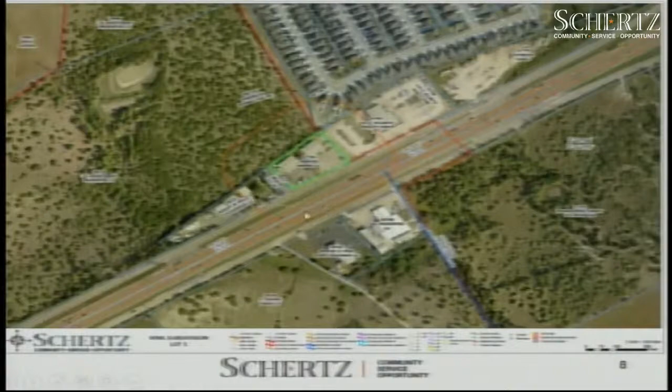Here is the public hearing notification map. Again, outlined in blue is the subject property, with the 200-foot notification buffer. Here is the City of Schertz city limits and the City of New Braunfels on this portion. We sent 9 public hearing notices on April 28, 2021, and no responses have been received at this time.

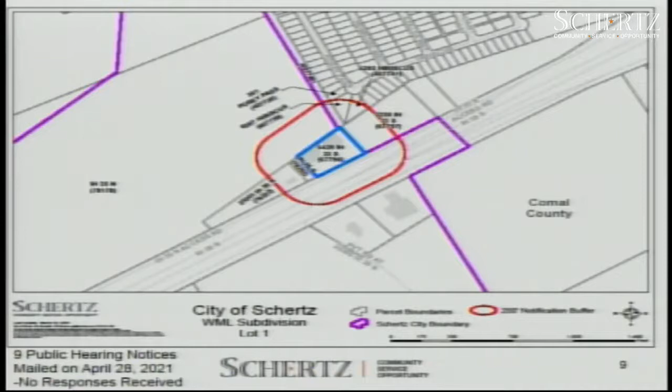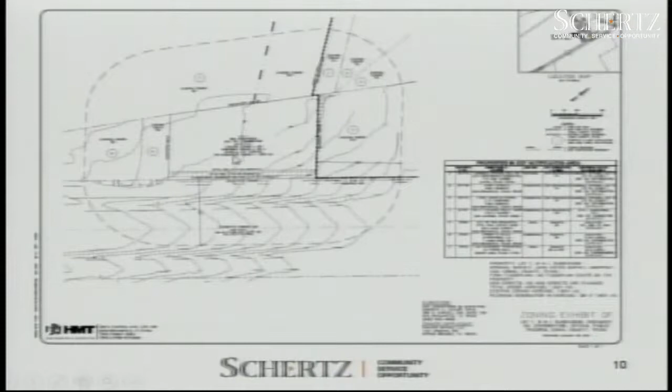Here is the zoning exhibit, demonstrating the subject property for reference, along with the City of Schertz city limits, City of New Braunfels, and IH-35. This is for the zone change from GB to GB2.

Outlined in yellow is the subject property. This is our current zoning map for the City of Schertz. The subject property is currently surrounded by parcels zoned General Business District and Pre-Development District, as you can see in purple to the north, with General Business adjacent to the City of New Braunfels. This is the City of Schertz city limits line, New Braunfels city limits, and the IH-35 frontage and highway. Except for the property within the City of New Braunfels, the immediately adjacent properties are currently undeveloped. As mentioned, here is that development in the General Business District.

This is an undeveloped parcel, as well as to the west, also undeveloped general business. Due to the surrounding zoning and land uses, the rezoning of this property is not compatible with the adjacent land uses, as it could allow for higher intensity commercial and industrial uses along the IH-35 frontage. The existing general business zoning designation is more compatible with the surrounding properties, along with the desires of the comprehensive land use plan.

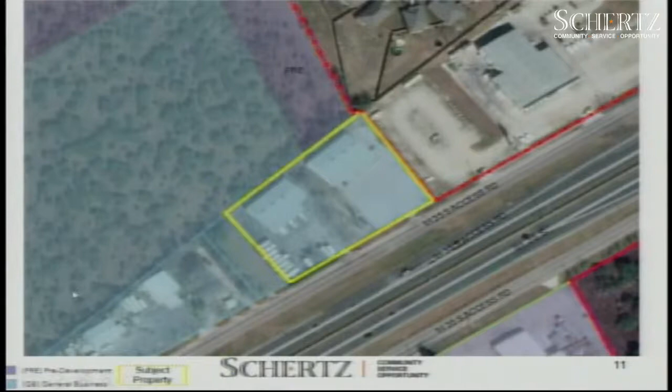Here is our comprehensive land use plan with the designation of the commercial campus outlined in blue. The objective of the commercial campus future land use designation is to accommodate development of lower intensity commercial and office uses, utilizing a variety of mostly office, flex space, and light industrial. The commercial campus designation is associated with the General Business District based on the land uses allowed by right per the Unified Development Code table. Shortly I'll have a slide with those designations.

The General Business District 2, GB2, is a high-intensity zoning district which permits land uses that would not be compatible with the desires and objectives of the commercial campus, which overall is to maintain lower intensity commercial and office use along the I-35 frontage. Just to reiterate, this is the I-35 frontage right in front of this subject property.

The proposed zone change from General Business District to General Business District 2 is not compatible with the comprehensive land use plan and the Schertz sector plan, as the upzoning would allow for higher intensity land uses, which would not be in line with the current designation of having the I-35 frontage corridor identified for lighter intensity commercial retail type land uses.

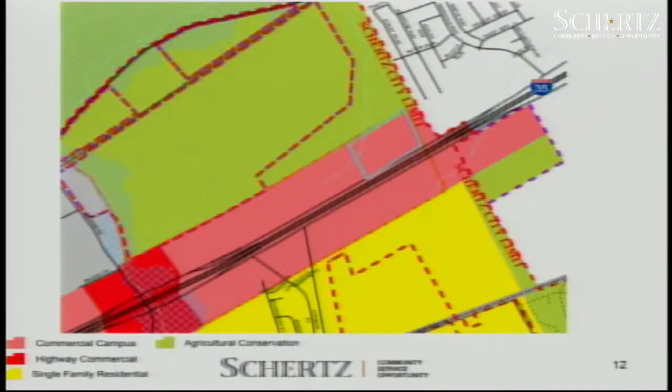This is from our permitted use table within the UDC. The following uses would be permitted by right or could be approved with an SUP if the proposed zone change to GB2 were approved, that are not currently permitted by right within the general business zoning district. Let me go over a few of these.

Currently, airport, heliport, and landing field would require an SUP in general business; however, under general business 2 this would be permitted. Another example is automobile repair and service major, which requires an SUP in general business district, but would be permitted by right under general business 2. General manufacturing and industrial use would also be permitted by right, as well as office, warehouse, and distribution center. Truck terminal would require an SUP for general business, but would be permitted by right with general business 2.

This gives an idea, since there have been questions wanting to know the distinction of the general business 2 designation versus other land uses, of what could be permitted by right within that general business 2 district.

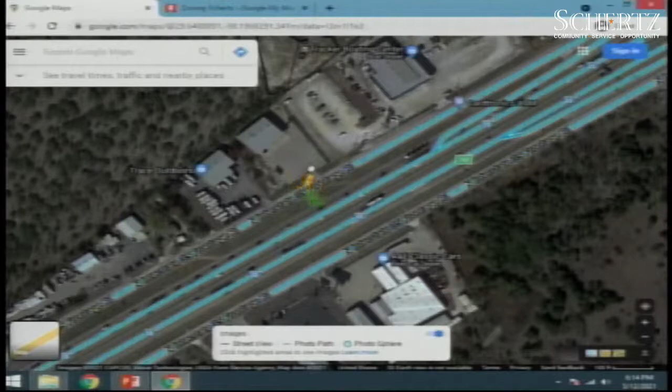I'm showing the overhead satellite view of our property here, and you can see this is the primary problem we're dealing with right now. This is 6410 North I-35. This piece of property is surrounded by an RV center to the left and a boat distribution center to the right. Let me show you—I love this little guy, he just bounces right wherever you drop him.

So that's our building. The most recent tenant was Stable Lift Foundation Repair. They would go underneath your house, jack it up, get it level, come back later and seal the house back up. That was their job. They filed bankruptcy in August of last year—that's been a joy. But every night they had this scenario going on. This is a picture from Google Maps, but it's an accurate representation. From morning until night, they always had cars parked in front, mostly up underneath these eaves. Sometimes they'd have one or two vehicles.

Let me show you what's to the left and what's to the right. To the right is Tracker Boats. While the Tracker shop over there is in the city of New Braunfels, all these boats parked there are backing up to the city line between Schertz and New Braunfels. So if you're looking for consistent use, that's at least one thing to look at, okay?

But let's look at the left. This is in the city of Schertz—this is Texas RV Repair and Sales. They have a repair and sales shop for large motorhomes, parked there 24 hours a day, 7 days a week, which under the GB zoning is a non-conforming use, a violation, okay? If we turn around for reference, this is the classic auto shop across the way that has 7 or 8 vehicles parked there 24/7, morning, noon, and night. Slightly to the right of that is Blackjack, another automotive sales and repair center, also zoned GB, but has an SUP so they get to do major automotive repair. Still doesn't allow them to park overnight.

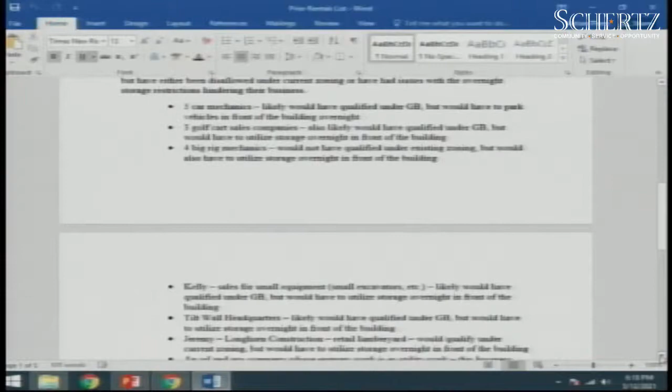Come on down to the rejected use, please. Since then we've had 5 car mechanics who'd like to come be in there, but they can't park in front overnight. 3 golf cart sales companies, but they can't put their property out front overnight. 4 big rig mechanics, a small equipment sales company, Kelly's small equipment, and Tilt Wall headquarters.

When you see this list, what we're doing is when somebody calls us and says, hey, we see you've got a beautiful warehouse for rent, can we use this for our business, we give them the phone number to planning and zoning and say, give them a call, run it by them, see what you get. Reject, reject, reject, reject, reject.

Even though to the left you've got vehicles parked overnight, even though to the right you've got vehicles parked overnight. And it's not just this chunk out on the hinterlands of Schertz, Texas. We've got overnight vehicles parked up and down.

Now let me see if I can use some of the vocabulary—sorry, I'm still trying to get used to this. According to the comprehensive use plan, we're not supposed to have GB2 along I-35, and we're not supposed to have GB2 along I-10. But we do. Remember the Valero station up there off of, not Schwab, the one after, Hubertus.

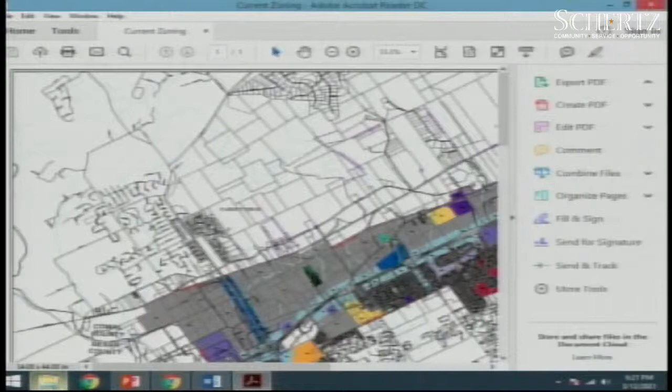United Rentals, thank you. Let me show you United Rentals. Ooh, they've got theirs kind of along the side and up close to the front. Show me the list again.

Sunbelt. So these are some of the vehicles parked out front of Sunbelt Rental. Yeah, you can see that one a little bit better. What was the other equipment rental? There are 4 or 5 equipment rental places, and we've been told, nope, you can't have an equipment rental. That's not a conforming use, even though all along I-35, it's a conforming use.

Which one? The H&E equipment? Yeah, and you can see from the access road, these are parked along the side and even close to the front. Keep rolling through the nighttime pictures, please.

So the problem we're running into is this. We need y'all's help, quite frankly. I don't know whether you want a GB2, I don't know whether you want an SUP. An SUP is really expensive. I don't know if you all have had to go down this road, but you've got to come up with a site plan that I have to hire an engineering firm to do, and that is no small expense.

Now, the staff's been very helpful in that regard. They've let us know, hey, we're trying to get approval to be able to have SUPs without a site plan. And they even said we can come in here and talk about it, just try not to... oh, there's the classic cars right across the street from us with their trucks overnight.

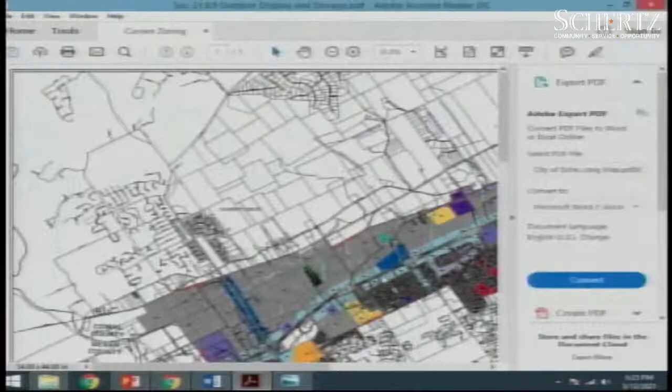This is the definition that we're really struggling to get around and to deal with. There you go. Let's see, can you hit that little sidebar button right there? That's a little better. Okay.

Categories of outdoor storage and display. You have the top one for outdoor display for small equipment, and then the bottom one, general outdoor storage. The general outdoor storage is prohibited within the public right-of-way or fire lane. It's not allowed to be seen by anything that's within the right-of-way of the highway.

And if you look at A above it, it's all remaining forms of outdoor storage, including stuff that's not easily moved — vehicles, semi-trailers, storage containers.

We are in a position where no matter how we fit under GB or GB2, this is going to prohibit us from having almost any business, including the ones we've already had and the ones who are knocking on our door now. And this is the dilemma that I need help with, to be able to explain and provide a solution to my client.

Unfortunately, he couldn't be here tonight. He had a medical test this morning. He was not able to get back here.

I'm more than happy to submit that SUP, and we've got one already pending in front of the city's staff right now. But that SUP — if you'll pull up the SUP list that we had.

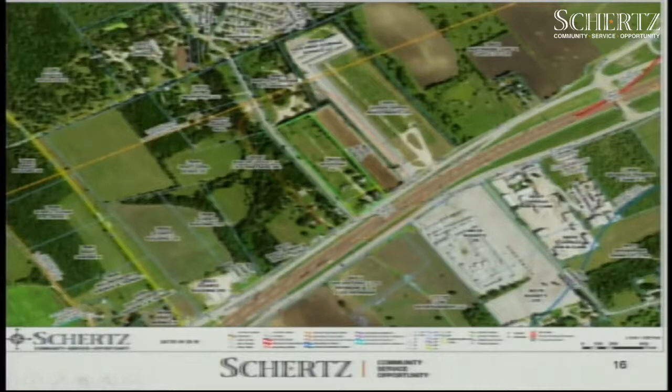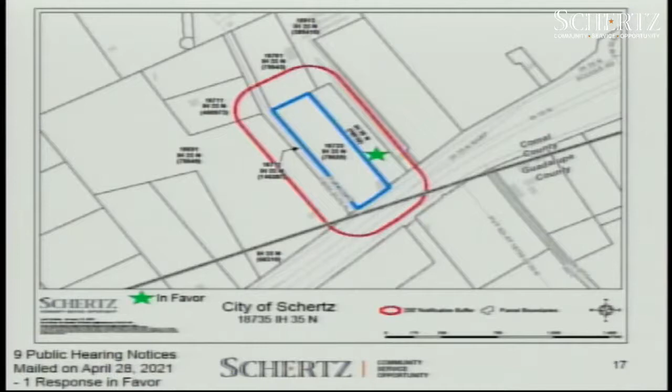Here is IH 35 and the notification boundary for the 200 feet. Here is the public hearing notice map that was sent out on April 28, 2021. 9 public hearing notices were mailed, and we had 1 response in favor. Here is the property outlined in blue and that 200-foot notification boundary, and indicated with the green star is the property that submitted the in-favor response after the agenda was posted. So we did receive that after it was posted on Friday, so I just wanted to provide the zoning exhibit.

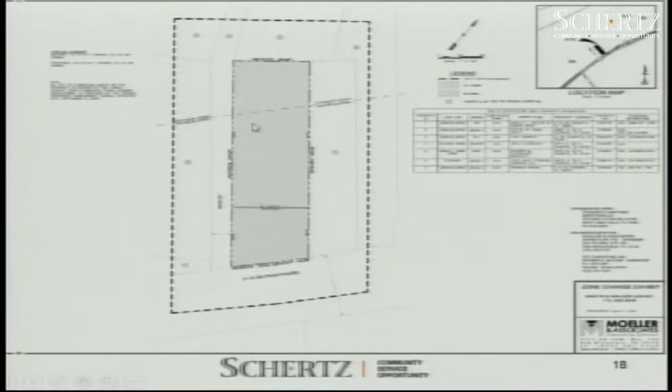So as you were probably reading, you're probably wondering about the GBM1 to GBM1. Currently, this is the line for the manufacturing light in the back portion, and then in the front portion is the general business. On the next slide, we'll get into the acreage of that.

So as mentioned, this is the zoning exhibit. The designation for the existing zoning of M1 and GB has the 4.5 acres outlined as general business, and the 1.4 acres for manufacturing light. The proposed zoning request is to have 1.6 acres for general business as indicated here, and to increase the manufacturing light to 4.3 acres as indicated here.

Essentially, the applicant is requesting to reduce the acreage currently zoned general business district and increase the zoned manufacturing light district. The proposed area would remain general business district up front, and this would comply with the lot width and depth minimum requirement for the zoning district of 100 by 100 in the UDC.

Here's the current zoning map. This property is outlined in yellow. Again, this is the current zoning map, so it shows the indication of general business all the way back here with the manufacturing light in the back. Just to reiterate, they are wanting to move that general business up and have the M1 come forward. This is still IH 35, so it is still keeping with that GB on the frontage.

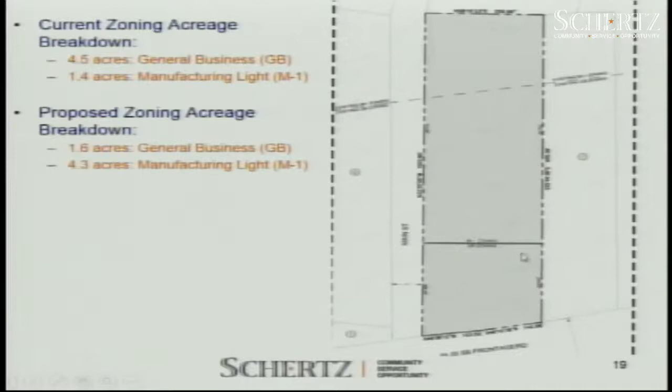As you can see with the current zoning, the subject property is surrounded by several parcels zoned general business district and manufacturing light. The rezoning of this property is compatible with the adjacent land uses, as the general business district is intended to provide lower intensity commercial along the I-35 frontage, keeping manufacturing light along the back portion. Additionally, the property to the rear of the subject is adjacent to the currently zoned manufacturing light district portion of the property, so the proposed zone change should have minimal impact.

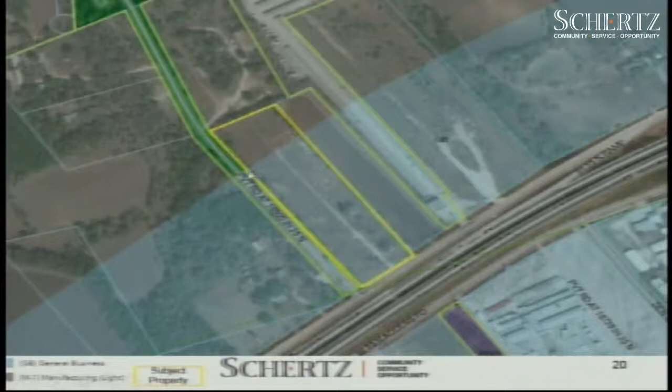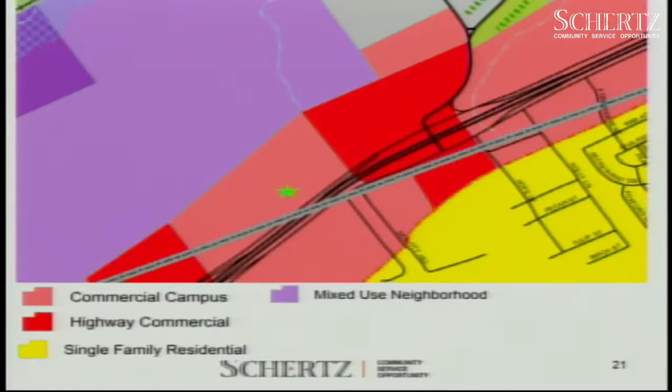The proposed zone change, which would maintain the general business in the front with 1.6 acres, will allow the lower intensity land uses that are desired immediately adjacent to I-35. The general business district and manufacturing light meets the goals and objectives of the commercial campus future land use designation by permitting lower intensity commercial and office uses along the I-35 frontage.

At this time, staff recommends approval of the proposed zone change to modify the acreage of the existing zoning designations, based on the proposed zone change being consistent with the goals and objectives of the comprehensive land use plan. The proposed zone change, which maintains the general business GB along the IH-35 frontage, will allow for the commercial, retail, and office uses desired within the commercial campus designation. The proposed zone change should have minimal impact on the surrounding land uses.

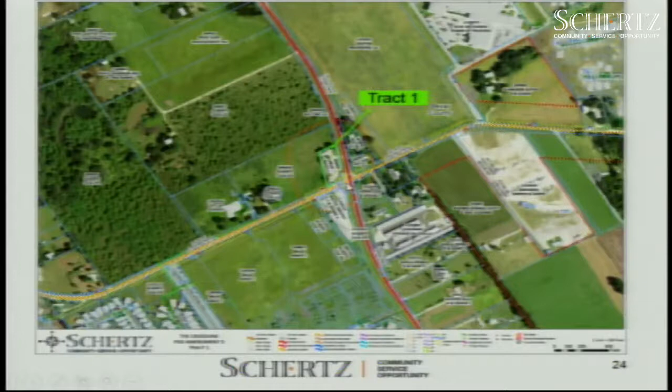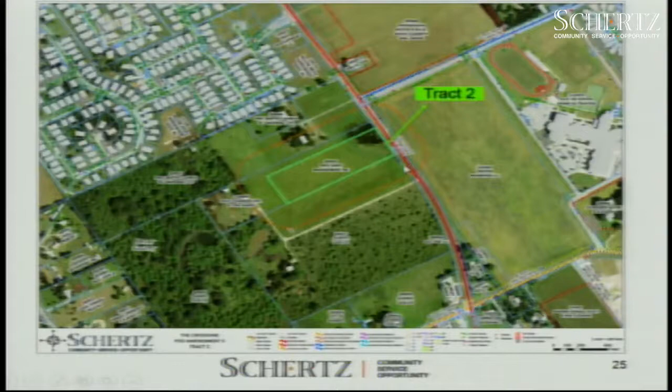This zone change request for approximately 61 acres is comprised of 3 separate tracts. As we go through the slides, we will reference them as tract 1, tract 2, and tract 3. Tract 1, outlined in green, is the hard corner of Lower Seguin and FM 1518. Tract 2 is the subject property outlined in green along 1518. Tract 3, outlined in green, comes down and back up, and is along FM 1518.

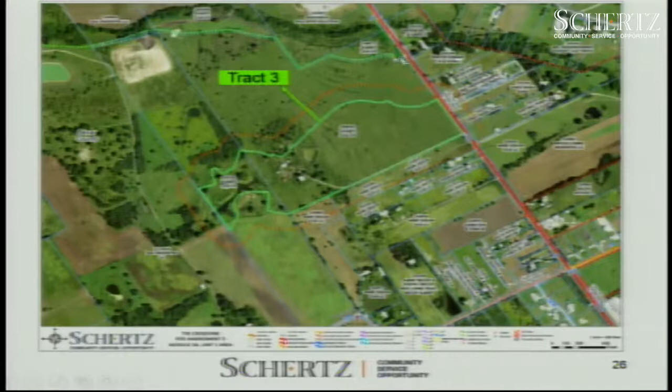With all 3 tracts, a total of 20 public hearing notices were sent out. We received 1 response in favor of the proposed zone change.

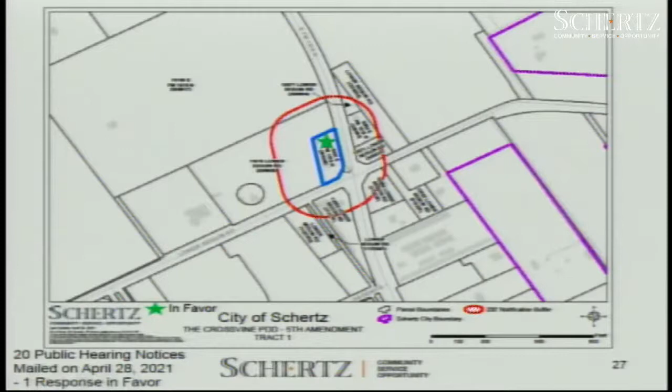This is the public hearing notice map for tract 1, outlined in blue, again the hard corner of Lower Seguin and 1518. Here is the public hearing notice map for tract 2, for the property outlined in blue, again along 1518. And tract 3 is outlined here in blue along the FM 1518 frontage.

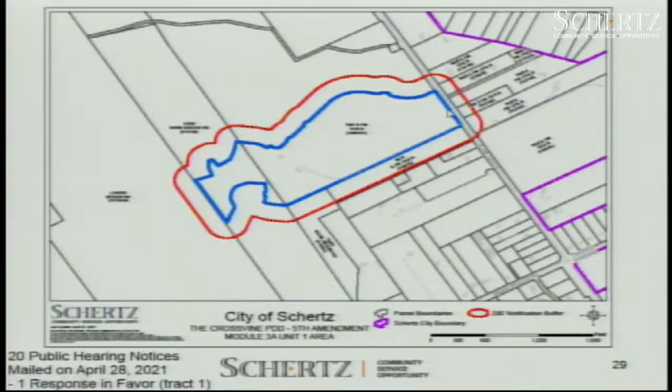As contemplated in the Crossvine PDD, this amendment, the 5th Amendment, is the continuation of the definition of the overall conceptual master plan and is primarily focused on the addition of property to the Crossvine PDD, hereafter referred to as Module 2B or Module 3A Unit 1. The Crossvine PDD remains in full force and effect, with the exception of matters addressed herein, which shall be considered amendments to the Crossvine PDD. Elements, requirements, and conditions set forth in the Crossvine PDD shall be deemed to apply to those portions of the property addressed by the 5th Amendment unless specifically excluded, changed, or modified. Similarly, nothing in this 5th Amendment shall be deemed to modify any elements, requirements, or conditions of the Crossvine PDD unless specified herein.

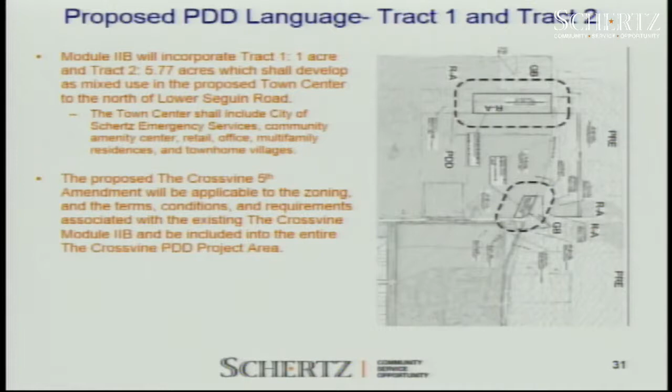This is for tract 1 and tract 2, which will be incorporated within Module 2B. Tract 1 is a 1-acre tract, currently zoned General Business. Tract 2, currently zoned Single-Family Residential Agricultural District, shall comply and develop as mixed use in the proposed town center to the north of Lower Seguin Road. The town center shall include City of Schertz emergency services, a community amenity center, retail, office, multifamily residences, and townhome villages. The proposed Crossvine 5th Amendment will be applicable to the zoning, terms, conditions, and requirements associated with the existing Crossvine Module 2B and will be included into the entire Crossvine PDD project area.

I wanted to provide this map, since the other map was more zoomed in — this one is the zoning exhibit zoomed out. Again, this is tract 1, right at the hard corner of Lower Seguin and 1518, zoned General Business, and tract 2, zoned Single-Family Residential Agricultural, along FM 1518.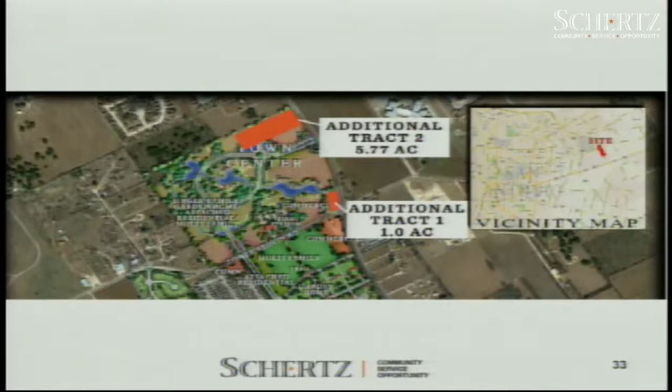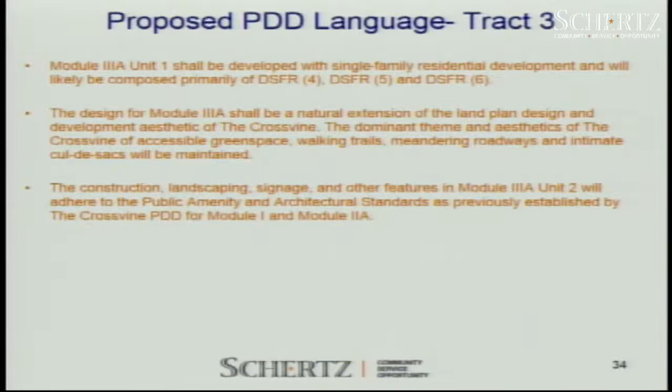Tract 3 will be known as Module 3A Unit 1, and shall be developed with single-family residential development, likely comprised primarily of DSFR 4, DSFR 5, and DSFR 6. We will go through those on the next slide. The design for Module 3A shall be a natural extension of the land plan design and development aesthetic of the Crossvine, maintaining the dominant theme of accessible green space, walking trails, meandering roadways, and intimate cul-de-sacs. Construction, landscaping, signage, and other features in Module 3A Unit 2 will adhere to the public amenity and architectural standards previously established by the Crossvine PDD for Module 1 and Module 2A.

So here's the zoning exhibit for tract 3, also known as Module 3A Unit 1. Within the PDD, they've highlighted, comprised of approximately 54 acres, this area for Module 3A Unit 1.

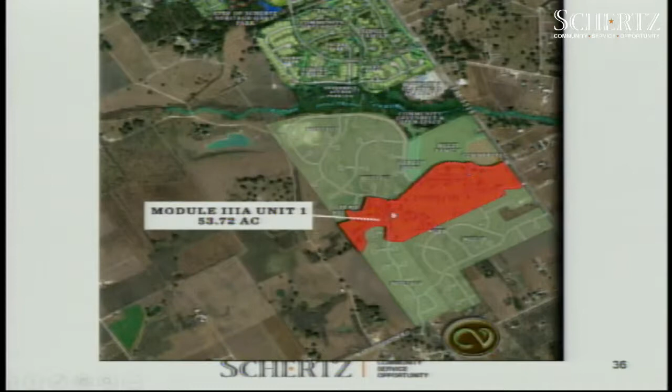For DSFR 4 through DSFR 6: DSFR 4 is 45 by 110, with 5-foot side yard setbacks, 10-foot rear setbacks, and 20-foot front setbacks. DSFR 5 is comprised of 55 by 110, again with 5-foot side yard, 10-foot rear, and 20-foot front setbacks. DSFR 6 is comprised of 65 by 115, with 5-foot side yard setback, 10-foot rear yard setback, and 20-foot front yard setback. The DSFR 4, DSFR 5, and DSFR 6 side setbacks are consistent with all previously approved amendments for the Crossvine PDD project area, with the exception of Ordinance 17-S-01 for Module 2A garden homes.

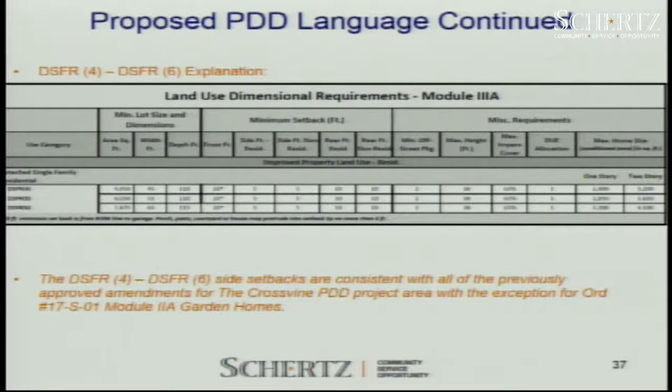For Module 3A, we'll include a proposed amenity center to be constructed concurrently with Module 3A Unit 2. The proposed amenity center will include: a lap pool suitable for competitive swim meets with dimensions of no less than 25 meters in length and 10.5 meters in width, a wading or splash pad appropriately sized with the other pool facilities, a conditioned interior building area with no less than 400 square feet of office area, a community room of no less than 1,000 square feet, restrooms and storage area, and an outdoor open air covered pavilion of no less than 1,750 square feet.

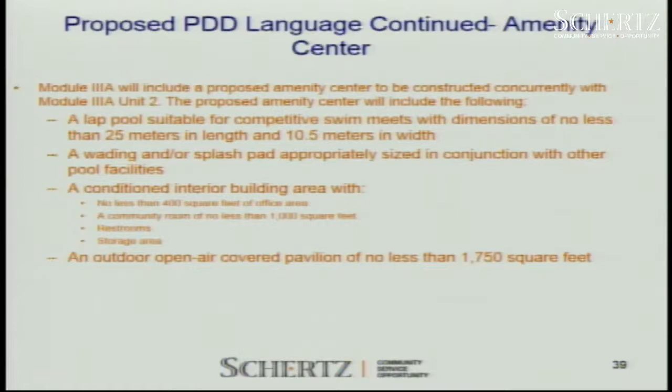Just wanted to provide the conceptual plan for Module 3. Here is 1518, and as previously mentioned, the amenity center is shown here in the conceptual plan.

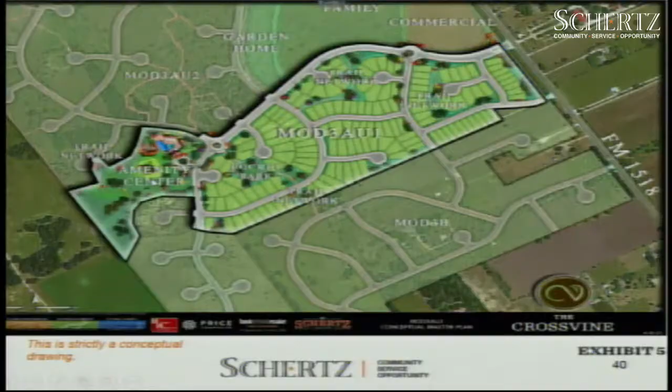As indicated with the red star is Tract 1, and for Tract 2, to the north of Lower Seguin at that hard corner of 1518. Tract 1 and Tract 2, the Crossvine Module 2B, is designed to be a town center with a mix of commercial, retail, and residential uses. The proposed zone change to incorporate this approximately 7 acre tract is directly in line with the goals and objectives of the mixed-use core.

Indicated here with the green is Tract 3, comprised of approximately 54 acres, identified by the Comprehensive Land Use Plan as an estate neighborhood. Traditionally, the estate neighborhood is designed to be a half-acre tract, but due to the fact that this property is already zoned as part of the Crossvine PDD, the estate neighborhood classification does not seem appropriate at this time.

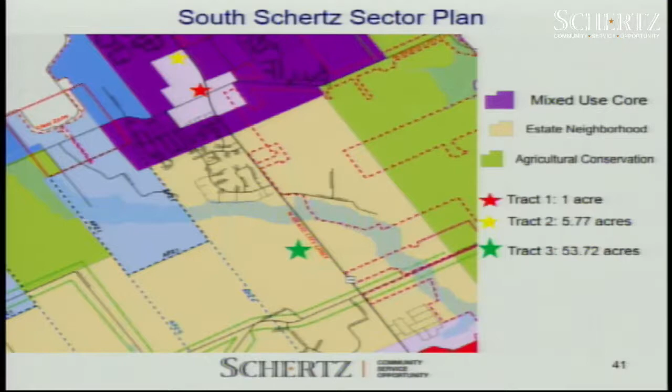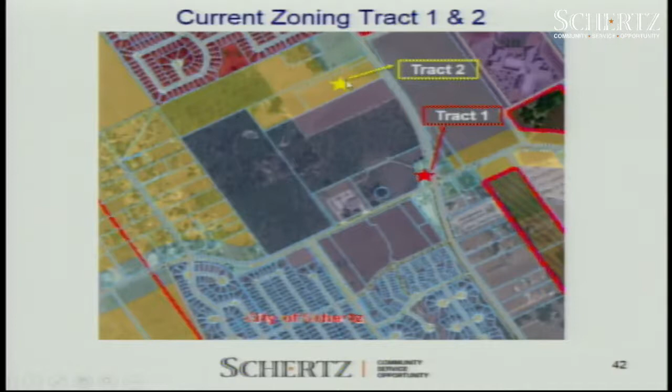So this is the current zoning map. As we can see with the red, this is Tract 1, having that GB designation, at the hard corner of Lower Seguin and 1518. Tract 2, indicated in yellow, is the property zoned single family residential agricultural. Tract 3, with the star, is currently zoned as the Crossvine PDD along FM 1518.

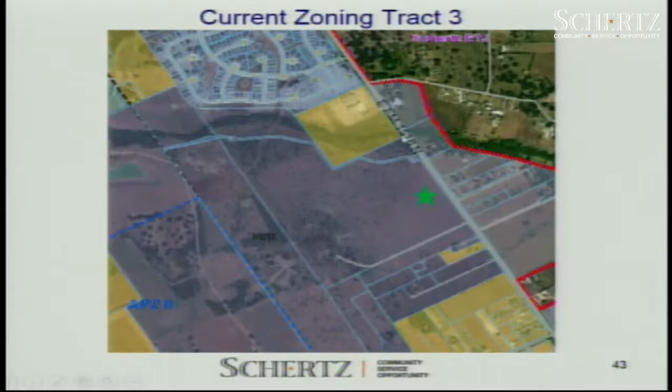Just wanted to provide an overview of the full Crossvine PDD, starting at the northern portion. Here is FM 1518 and Lower Seguin. For reference, this was the recently approved Fourth Amendment to include that 58 acres previously.

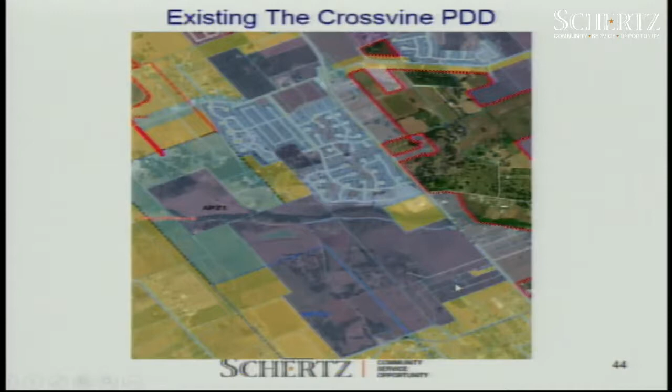So, staff analysis of the PDD. Based on Tract 1 abutting a major intersection of Lower Seguin Road and FM 1518, currently surrounded by the Crossvine PDD zone properties, and the proposal to incorporate this additional 1 acre into the Crossvine Module 2B, there should be a minimal impact on the adjacent properties.

Based on Tract 2, directly adjacent to FM 1518 and properties already within the Crossvine PDD, and proposed to be Module 2B, there should be minimal impact on the adjacent properties.

Since the Crossvine Module 2B is designed to be a town center with a mix of commercial, retail, and residential uses, the proposed zone change to incorporate Tract 1 and Tract 2, comprising approximately 7 acres, is directly in conformance with the Comprehensive Land Use Plan goals and objectives for the mixed-use core. Specifically, the proposed PDD standards will allow these 2 tracts totaling approximately 7 acres to be developed as proposed with Module 2B.

Tract 3 is approximately 54 acres, currently zoned as part of the Crossvine PDD, and is proposed to be included within the Crossvine PDD Fifth Amendment, essentially updating the current Crossvine regulations for the identified subject area. Since the property is currently zoned for the Crossvine, the proposed amendments to the PDD standards should have minimal impact to the adjacent land uses.

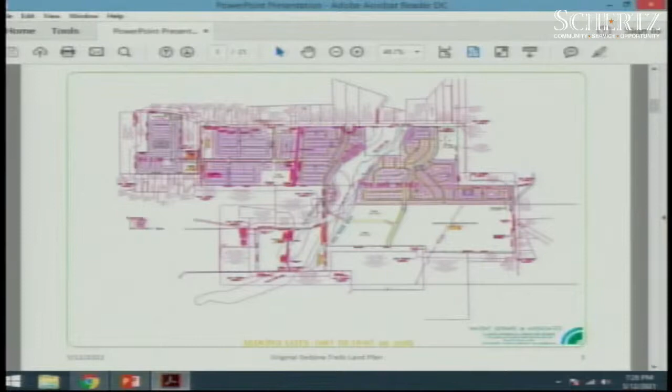This may be a little difficult to use or view, but this was the original master plan. Now, there are two key elements to this plan, really the PDD in general in this plan. One was the addition of additional properties added to the project as opportunities warranted. The other element of it was, because of the size of the development and the number of years it would be involved, we broke the project up into 3 what we call modules. And the city wanted that because it allowed them to come back, and we would have to come before P&Z and council each time we did a new phase or development.

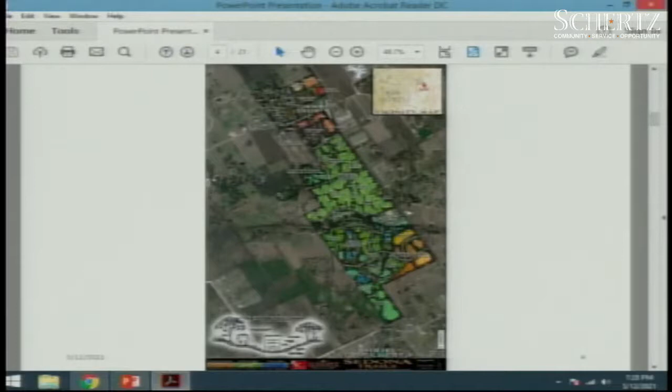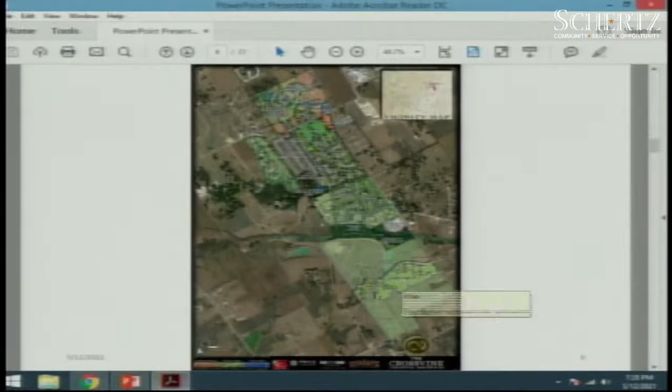So that's what we've done. This is—if you'll point out—when it was originally done, this 13-acre parcel was not involved, and then when we go further, we've added this property here, this 13 acres. We also added a parcel, an out parcel, that was down here over the years. This is where we are today, looking at the development, and this is the project that Megan just did a great job going through.

One thing I want to mention is another element of the master plan was that the densest development would be at the intersection of Lower Seguin Road and 1518. It was contemplated that this would be a town center use, where your retail and denser housing types would be located.

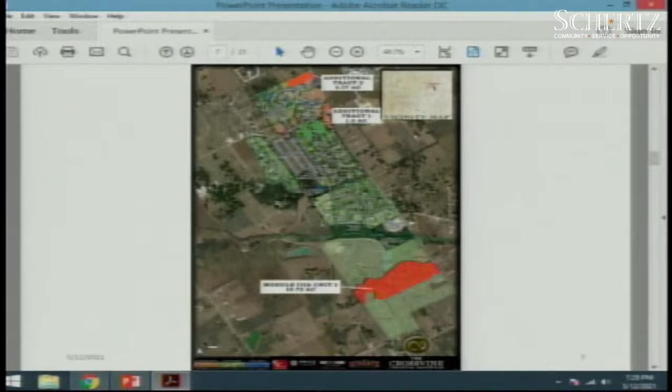This is an illustration of what we're looking at doing here in Module 4A. Megan did a good job of explaining that. One of the things we are going to do with this plat is plat the amenity center, though the amenity center will be built with 4A Unit 2, so that will be done at that time.

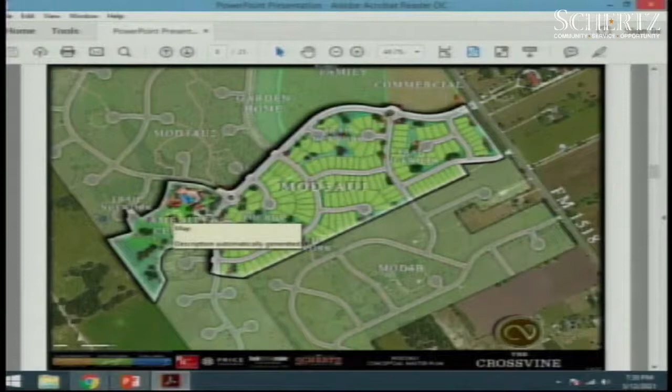Megan described quite accurately what we're planning on doing. I'll be frank, we're still programming out what those uses will be, and they'll develop as the community develops. This is just, again, a conceptual view of the amenity center, the lap pool, splash pad, that kind of thing.

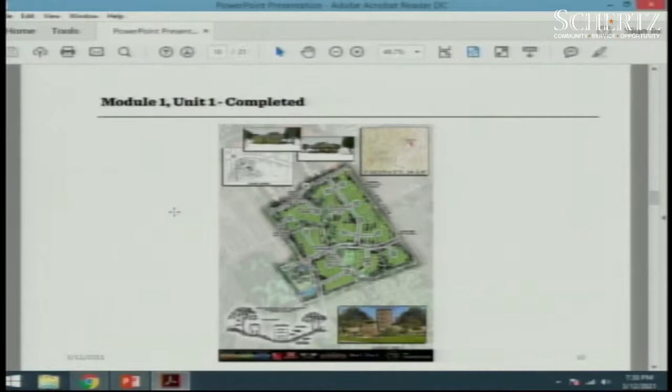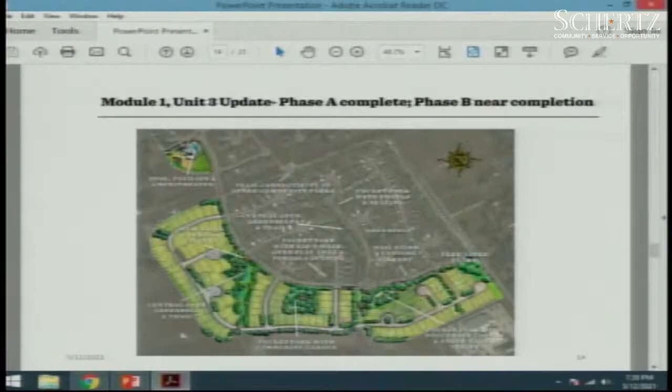This was the first phase that was completed. Some illustrations. The second phase is completed. And then this is the third phase, which is just wrapping up. This is the Pulte property, which is on the other side of Sedona, and that's wrapping up.

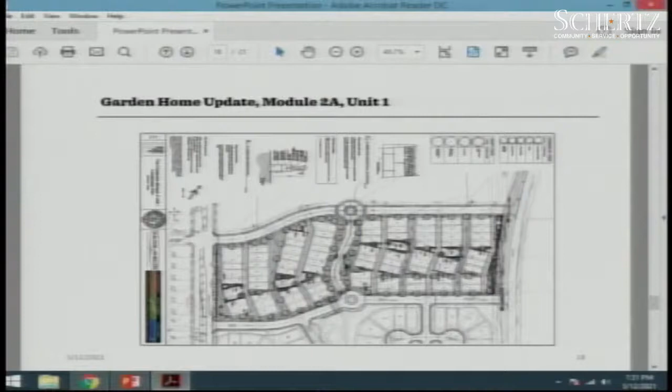This is the garden home section that you approved, I think, probably three and a half years ago. That's currently under construction. We hope to deliver those lots here in August. The builders on that will be Weekley and Scott Felder. We're quite excited about it, we think it's going to be good for the community. There's not much of that housing stock in Schertz, and so this will give those that are looking for that the opportunity to stay or move to Schertz.

Again, this is the master plan of the town center. One thing I want to stress, this is purely conceptual, it won't likely look anything like this. This was done about 5 years ago. There's also some errors in here in that, for instance, the property we're bringing into the development in this PDD request is indicated as being fully developed, as well as a property behind it. So I want to make sure everybody's aware that that's not included. This was really for illustrative purposes.

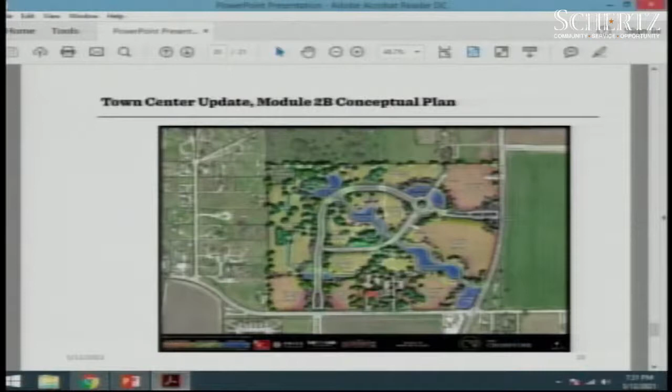As for the PDD amendment, most of what is in the PDD amendment is really strengthening or reinforcing issues in the PDD, whether it be landscaping, drainage, that kind of thing. I'd say the most substantive change is the fact that we're seeking 45, 55, and 65-foot lots as opposed to the 50, 60, and 70s that we currently have.

What's really driving that decision is pricing in the Crossvine is doing much better than we ever would have dreamt. You're looking at homes starting in the mid-300s going up to close to 600,000 now. What that presents to us, and more importantly the builders, is it makes it difficult for the VA, because the max on a VA loan is 548. This is one way to allow us to deliver a product that still has the same feel and quality that you get on the 40 or the 50, 60, and 70s.

So that, Bradley, did I leave anything out? We're available for any questions. All right, Mr. Price, thank you for that presentation, a lot of good information there. Thank you.

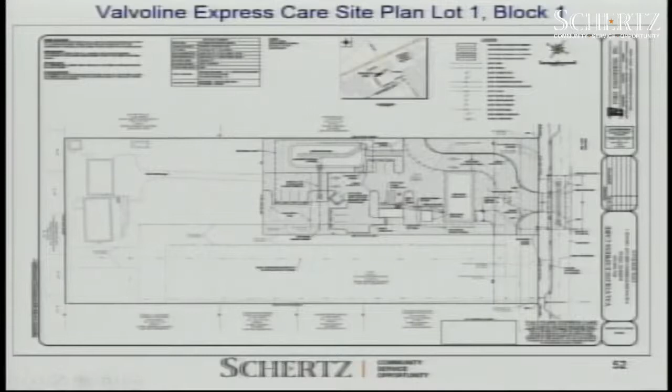So if there's any questions or feedback or suggestions, please send them my way. Happy to make any changes. All right, thank you.